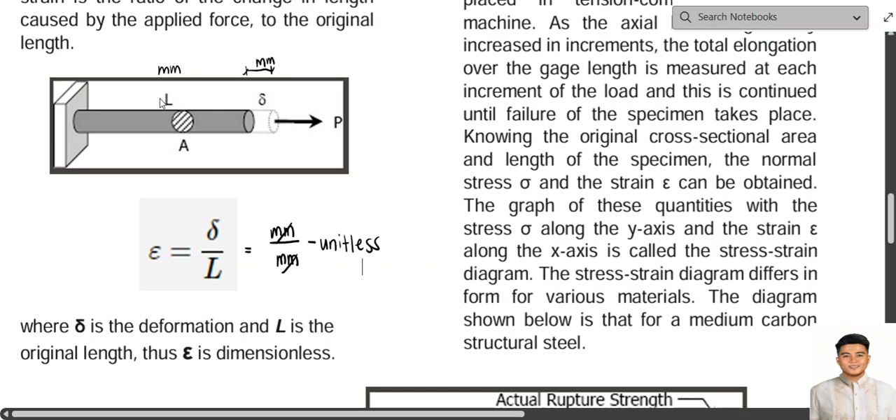And since our formula is delta over L, the unit of delta is in terms of length, or dimension, which is millimeters. And your length is also in millimeters. So what happens here is our epsilon is millimeter over millimeter, or in short, this is unitless. So our strain is unitless, it's like it's in terms of percentage.

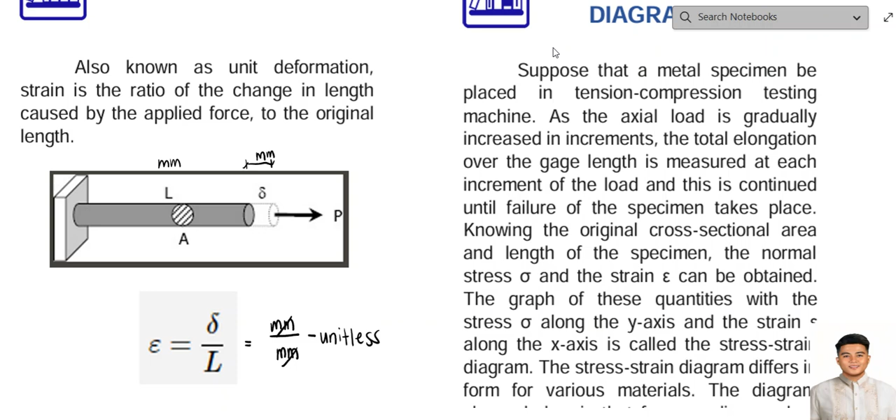Okay, so we have our Lesson 2.2, Stress-Strain Diagram. We can relate or state the relationship of stress and strain using the stress-strain diagram. So what happens here, why did they formulate this diagram? Suppose that a metal specimen is placed in a tension-compression testing machine. As the axial load is gradually increased in increments, the total elongation over the gauge length is measured at each increment of the load, and this is continued until failure of the specimen takes place.

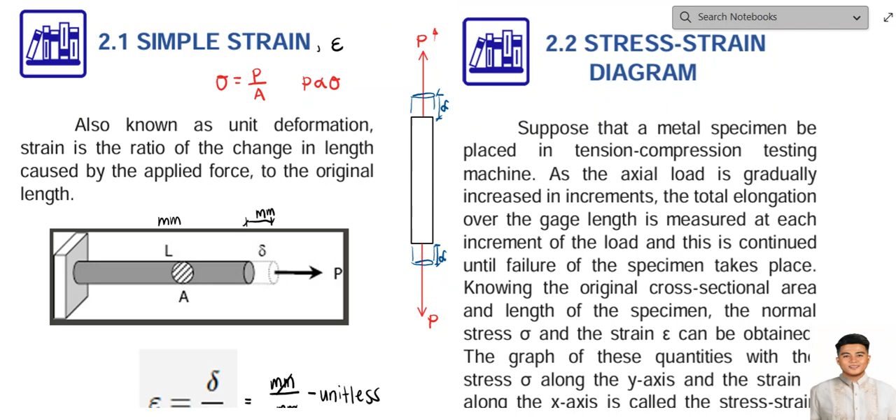So ito yung nangyayari sa ating member, itong puti. Pag nag-apply tayo ng tensile force dyan, tumataas yung stress mo, tumataas din yung kanyang strain. Nakita nyo po, itong point na to, naka-X dito, this will be the point wherein magka-crack na or mag-fail na yung ating member. Dyan na din matatapos yung ating graph kapag nag-fail na yung ating member.

Okay, i-define natin itong mga points na meron sa ating stress-strain diagram. Ito yung ating example ng stress-strain diagram with the given known points. Meron tayong tatlong points dito sa part na to, tinatawag natin siya as proportional limit, elastic limit, and the yield point. Ang tawag naman sa maximum ordinate or the maximum stress ay ultimate strength of the material.

Itong part na to, kagaya ng sinabi ko kanina, ito na yung part na kung saan magsisimula o naputol na yung ating member, so that should be your rupture strength. Meron din tayong tinatawag na actual rupture strength dito. So later on, i-explain natin kung ano ang pinagkaiba ng actual rupture at ng rupture strength natin.

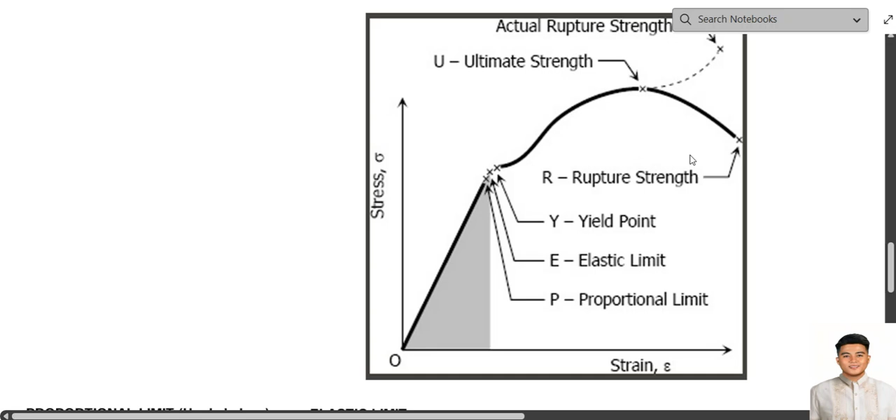Bago ko makalimutan, itong si strain natin, epsilon, pwedeng maclasify into two types. For letter A, yung unang type ng ating strain is yung normal strain.

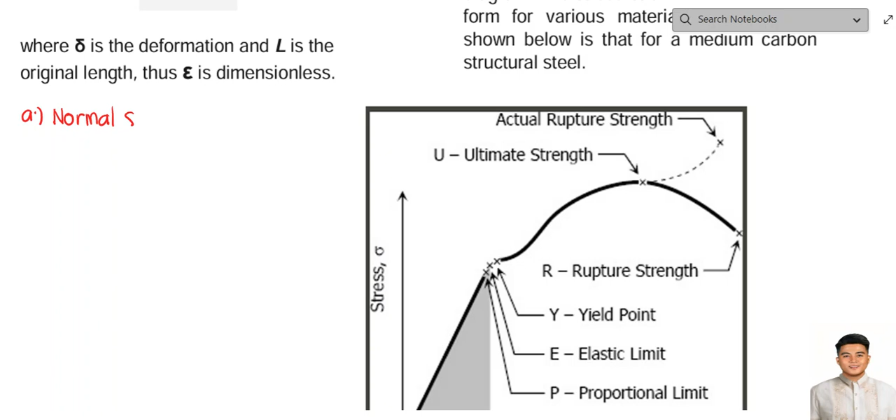Ito yung example natin na meron kang applied load dito, and then nagde-deform yan via its length. Ang nangyayari naman dito sa pangalawa, ito naman yung tinatawag nating shear strain, ang nangyayari is distortion. Ito, elongation naman to, or dimension changes.

Tandaan nyo ang pinagkaiba ni normal at ni shear strain: ang nagbabago kay normal is yung kanyang dimension o length, pwedeng mag-elongate o mag-shorten. Itong si shear strain naman, ang nagbabago dito is yung changes in angle, hindi shape, kasi hindi natin siya madidistinguish. Imagine kapag ganito yung cross section mo, square, kapag nag-apply ka ng shear strain, pwedeng mag-iba ang angle. From the original na 90-degree angle, nagbago na ngayon. Ibig sabihin, ang shear strain ay nangyayari kapag may pagbabago sa angle.

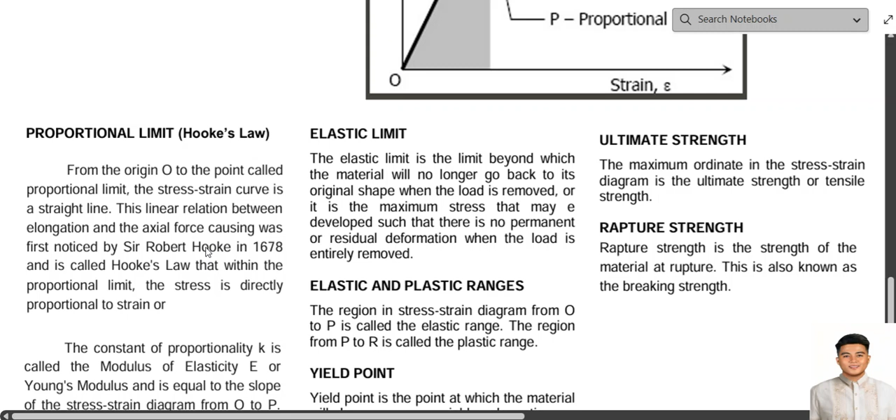Dito sa part, yung naka-gray na shade, mula sa point ng elastic limit papunta dun sa point O, ito yung tinatawag nating elastic region.

Itong block na to na makapal, papunta lang dito sa point na to, wherein si proportional ay up to the proportional limit, as we can see, nag-create yan ng straight line. Ang ibig sabihin, the relationship of stress and strain is linear dito sa part na to. Pag sinabi nating linear, as the stress increases, the strain also increases.

Ang relationship neto is linear, and we can represent this in equation. Stress is directly proportional to your strain, ito yung general equation natin dito. Pero kapag ginawa natin ito in the form of equal sign, stress is equal to, magtatabi tayo dito ng proportionality constant K multiplied by our strain.

Itong proportionality constant K, ano ba yung constant property ng ating material? So ito yung tinatawag nating modulus of elasticity, si E. Palitan natin si K ng E.

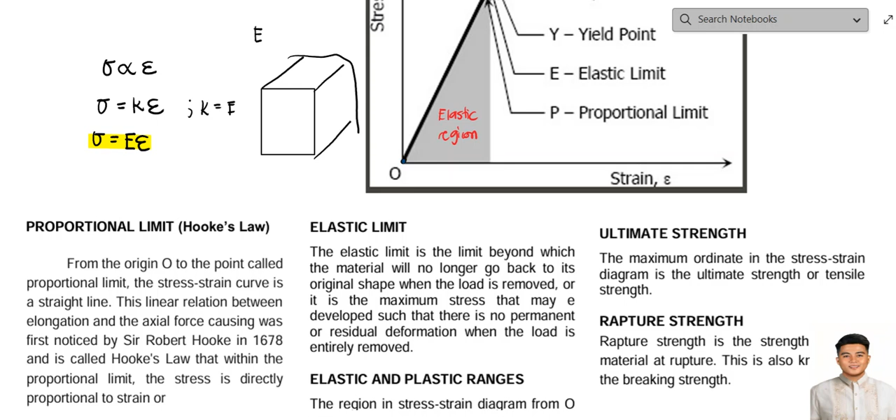Sa ating reinforced concrete design, RCD, let's say this is your cross-sectional area of your beam, and then this is the cut na part. Gumagamit tayo ng concept of Hooke's law to determine the dimension of the beam, let's say this is H or the height, and this is B or the width of the beam.

Pwede din nating masolve yung required number of longitudinal bars dito sa ating beam na ilalagay, gamit ang concept of Hooke's law. Ayun yung essence ng Hooke's law, bakit natin pinag-aaralan. First introduce dito sa ating strength of materials o mechanics of deformable bodies, at magagamit nyo ito sa inyong design subject.

Ito lang naman yung gustong sabihin ni Hooke's law. Ito yung formula. Proportional limit is also known as Hooke's law, which tells us that the stress is directly proportional to your strain. Ito yung formula na gagamitin natin dito.

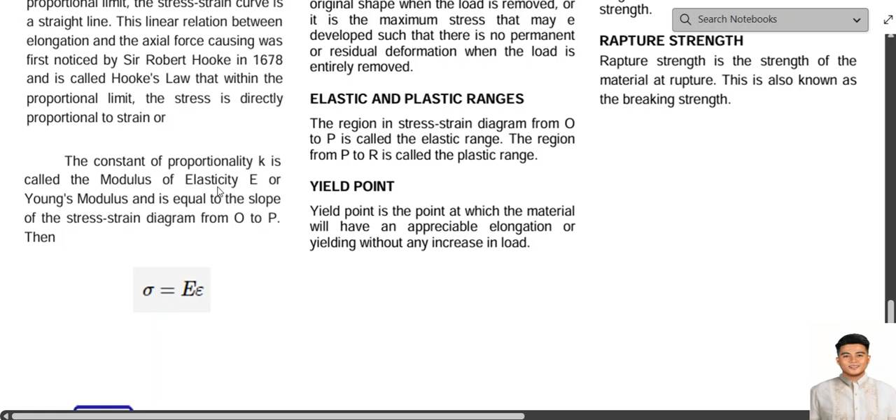Ang modulus of elasticity E ay nagvavary depende sa type of material na given. Pero ito yung gusto kong tandaan nyo: ang modulus of elasticity ng steel should be equal to 200,000 mega Pascal. At in terms of English unit, this is equal to 29,000 KSI. Yan yung dalawang values natin for the modulus of elasticity of steel, metric and English unit.

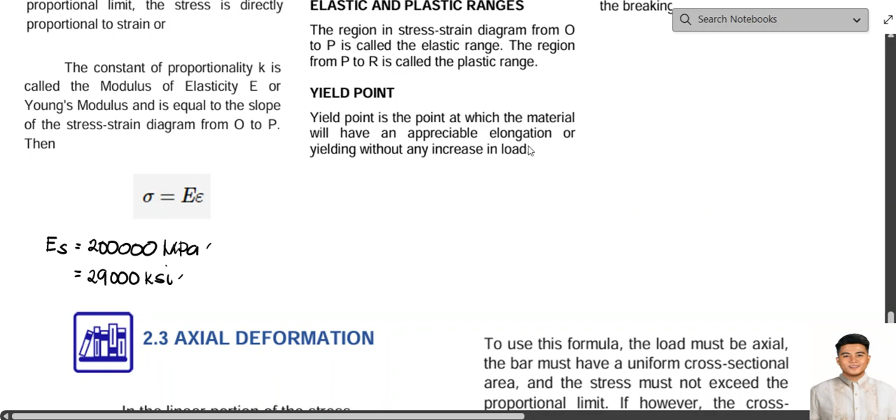Next naman natin ay yung elastic limit. Ang elastic limit ay ang limit beyond which the material will no longer go back to its original shape when the load is removed.

Ang nangyayari dito sa ating elastic limit, ito daw yung point. Mula dito sa point O, tumataas ka ng tumataas, let's say nakarating ka sa point na to. Pag inalis mo na ngayon yung load P mo dyan, ang tendency ay babalik pa rin sa dati niyang shape, dati niyang length, dati niyang itsura yung ating member na nahatak.

Pero once na ma-reach ng ating stress yung tinatawag nating elastic limit, from the word itself, hanggang dyan lang siya magiging elastic. Lower than this point, babalik pa siya sa ating original shape. Pero kapag na-reach na niya si elastic limit, magsi-start na dun, hindi na babalik yung ating member sa dati niyang itsura o shape.

Ibig sabihin, kapag inalis mo yung load P dito sa member na to, at na-reach na niya si elastic limit, hindi na siya babalik sa kanyang dating shape. Tandaan nyo, from this point pababa, itong gray na region ay ang tinatawag nating elastic region, wherein babalik pa yung sa original shape niya ang material.

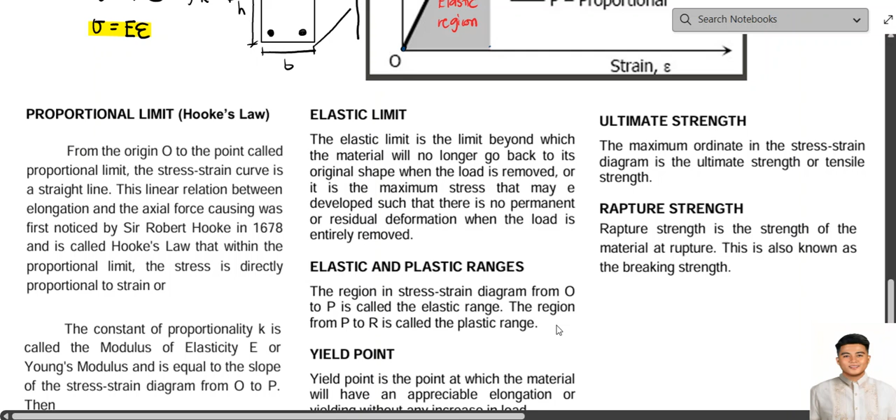Ano naman itong tinatawag nating elastic and plastic ranges? Ang region sa stress strain diagram from point O to point P ay tinatawag na elastic range, at ang region from point P to R ay tinatawag na plastic range. Itong naka-gray ay ang elastic region. Ang tawag din dito mula sa point ng elastic limit, point P, papunta dito sa ating point R, ito na ang tinatawag nating plastic region.

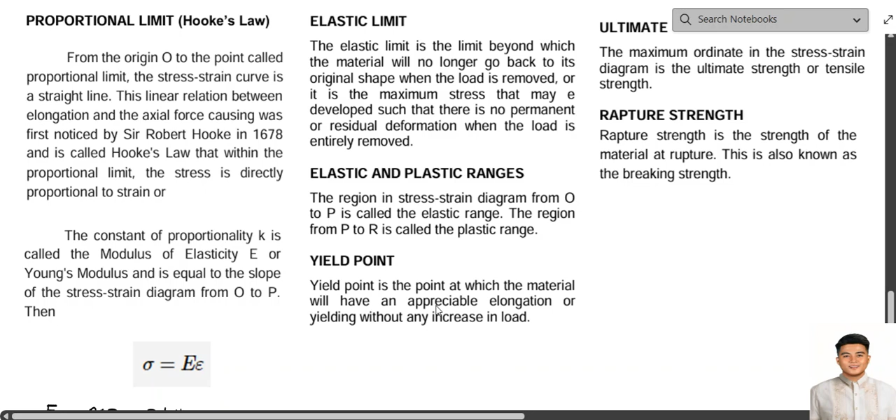So the next point is the yield point. Ang yield point ay ang point kung saan ang material ay magkakaroon ng appreciable elongation o yielding without any increase in the load. Dito sa yield point na to, magsi-start ng mag-yield yung ating member. Ano ba yung tinatawag nating yielding?

So yung yielding na tinatawag natin is that kapag yung ating load P dito, dinadagdagan natin ng dinadagdagan yung ating load P. Kaya tumataas din ng tumataas si strain. So pag na-reach niya na yung ating yield point, from that point, kahit hindi mo nadagdagan yung ating load P, patuloy pa rin nadadagdagan yung ating strain. Kaya napapansin nyo dito, kapag zoom in natin ito.

Pag zoom in natin yan, this will be your yield point. Magkakaroon pa yan ng horizontal na zero slope, parang horizontal yan. So ibig sabihin, pag nakarating ka na dito sa point na to, saka pa lang siya tataas ulit.

So, ang mangyayari dito sa ating yield point na tinatawag, nakita nyo, itong ating stress dito, iisa lang yung value. Stress, iisa lang yung value. Pero yung strain natin, nagbabago, tumataas ng tumataas. So ibig sabihin, kahit hindi mo dagdagan si force P dyan, tensile force P, patuloy pa rin na nag-elongate yung ating member. Yun yung kay yield point.

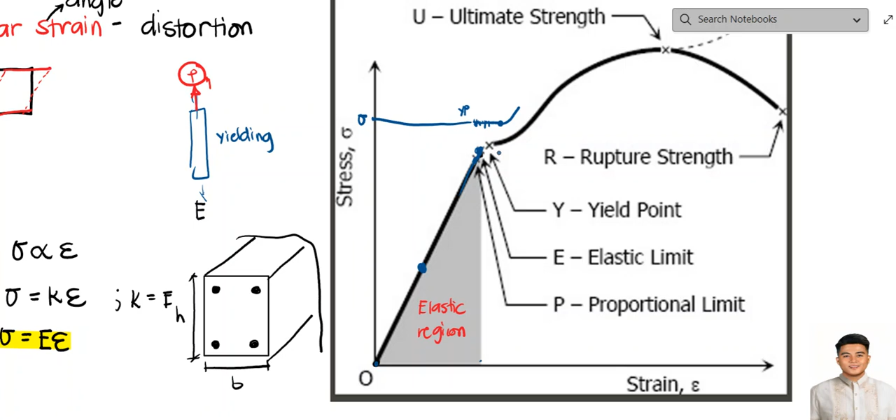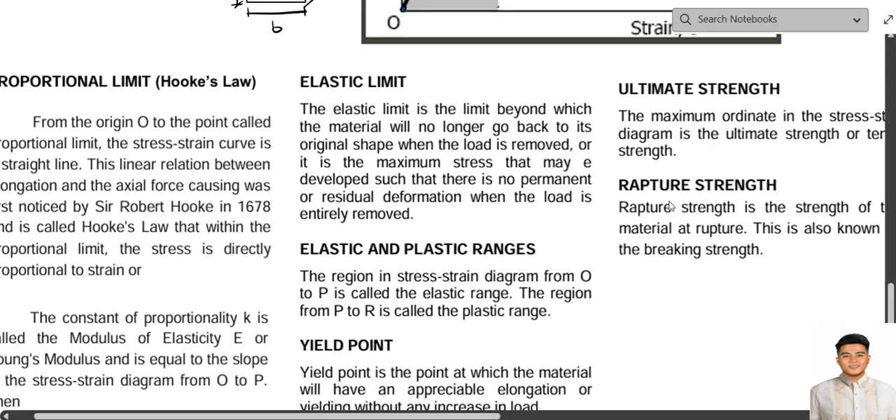So ang tawag doon is yielding. Yielding yung tawag sa nangyayari sa ating bakal na yun. So, how about the ultimate strength? Itong ultimate strength is the maximum ordinate in the stress-strain diagram. So, the maximum ordinate of the stress-strain diagram is the ultimate strength or the tensile strength.

So itong si ultimate strength natin, guys, ito na yung maximum possible stress na pwede mong i-apply doon sa ating material. And ito din na part, magsisimulang magkaroon ng necking na tinatawag.

Ano ba yung necking na tinatawag? Alam niyo yung kapag nasobrahan mo sa hatak yung isang member na bakal, pag na-reach niya na yung ultimate strength niya, that's the time na liliit yung cross-section dito sa part na yan. Tama po ba?

Tingnan nyo yung nangyari sa ating member kanina. Ulitin natin na yung nangyari sa member natin. Nag-a-apply tayo ng tensile force, until ma-reach niya yung maximum ordinate. So, nang na-reach niya na to, nagsimula na ding lumiit yung cross-section natin dito.

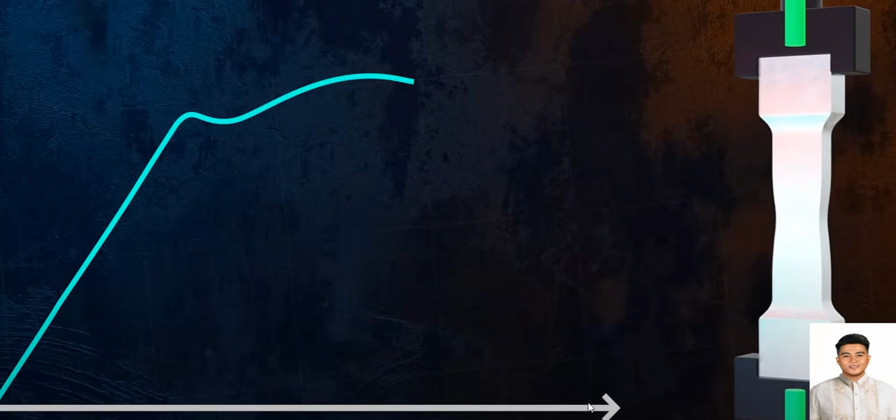Nakita nyo, lumiliit ng lumiliit hanggang mag-fail na po siya. So from this point to this point, nangyayari yung tinatawag nating necking. Yung lumiliit ng lumiliit yung cross-section natin hanggang sa mag-fail na po siya.

Kaya tignan nyo yung graph natin, bumaba siya. Nung nagsimula ng mag-necking, magkaroon ng necking, hihina si load P, kaya bumaba yung ating stress. Pero still, nag-elongate pa rin yan, kaya meron pa rin tayong pagtaas sa strain.

So sana mas maintindihan nyo yung concept ng ating stress-strain diagram kasi very crucial pagdating sa design subjects ninyo. And yung ating last point of the stress-strain diagram, ito yung tinatawag nating rupture strength or yung nominal tensile strength.

So from the word itself, nominal, ito talaga yung original tensile strength natin. So ano ang pinagkaiba naman nitong si actual rupture strength at ni rupture strength na nandito sa baba? So yun yung i-discuss ko ngayon.

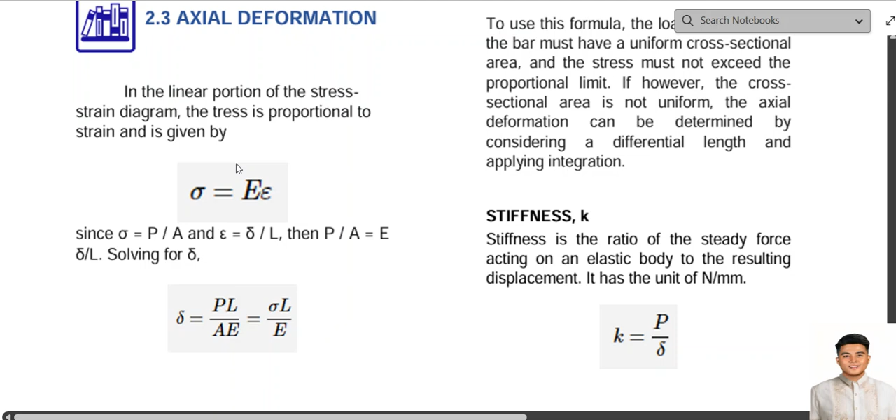So let's move on to axial deformation. In the linear portion of the stress-strain diagram, the stress is proportional to strain, as we derived earlier with Hooke's law. Using this formula, Hooke's law, stress equals the modulus of elasticity multiplied by strain.

And I mentioned earlier that your strain equals delta, or the elongation, divided by the original length, and your stress equals force over area. Substituting these two equations into Hooke's law, we get P over A equals E times the strain, which is elongation over L.

Pwede nating i-rewrite ito. Pwede nating masolve si elongation using the formula PL over EA. Ito yung formula natin for elongation, nanggaling sa concept ng strain at concept ng ating stress, at gano'n din kay Hooke's law. Ito yun, na-derive natin.

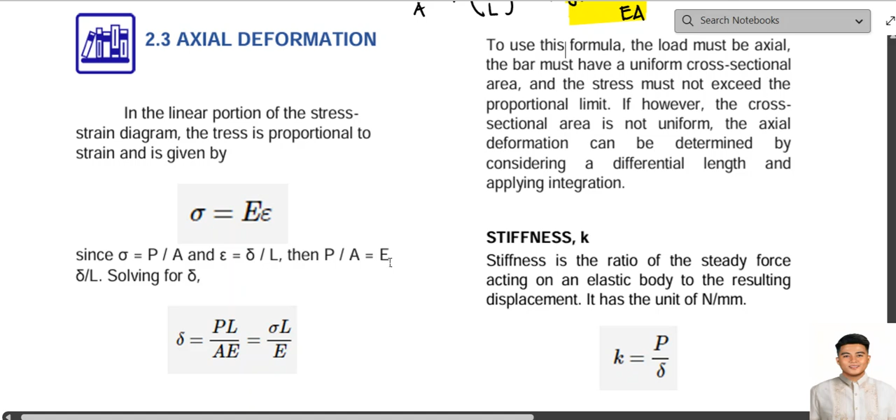So, to use this formula ng ating elongation, the load must be axial, the bar must have a uniform cross-sectional area, and the stress must not exceed the proportional limit.

If, however, the cross-sectional area is not uniform, the axial deformation can be determined by considering a differential length and applying integration. Itong PL over EA na to, ginagamit lang natin for uniform cross-section. Pero kapag hindi uniform, pwede mong gamitin itong formula ng elongation na to.

Sulat ko na lang. Elongation is equal to the integral of P, since yung cross-section is not uniform, so nagbabago yung kanyang area with a given length.

Let's say ito yung member mo, ganyan. So with respect to this axis, mag-measure ka ng length L, okay? From this point to the point kung ano yung area na yon. Tapos dito din, ganun din dun sa kabila. Ito din is L, until ma-reach mo yung kanyang maximum area.

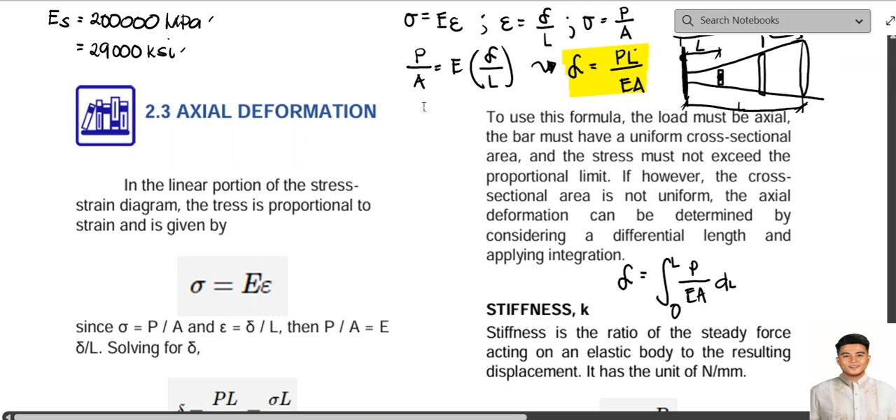At ito naman, dito naman tayo sa ating stiffness tinatawag, or stiffness K. Stiffness is the ratio of the steady force acting on an elastic body to the resulting displacement. It has the unit of Newton per millimeter. Ang mga examples ng material na may stiffness is actually yung mga bakal natin, yung spring, di ba? So, may stiffness K yun. Paki-take note na din tong formula ng ating stiffness K, which is equal to load P over the displacement or the elongation natin.

I think ready na tayo sa ating first example. Example number 1: A steel rod having a cross-sectional area of 300 mm squared and a length of 150 meters is suspended vertically from one end. It supports a tensile load of 20 kilonewtons at the lower end. If the unit mass of steel is 7,850 kilogram per cubic meter, and E is equal to 200 times 10 raised to 3 meganewton per meter squared, find the total elongation of the rod.

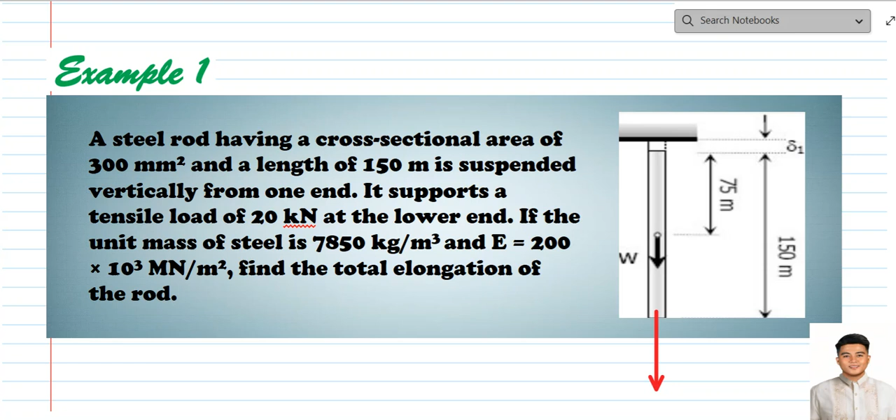Hindi lang nailagay dito sa ating figure yung given na tensile load P. Ito yung tensile load P natin at nandiyan yan sa pinakadulo. Ilagay na lang natin, this is 20 kilonewton.

Okay, sige. Solve natin to. Isulat muna natin yung mga given sa ating problem. Given natin, cross-sectional area. Area is equal to 300 millimeter squared. Length is equal to 150 meters, o i-convert natin into millimeters, that is 150,000 millimeters. Our tensile load P is equal to 20 kilonewtons, converted into Newton, we have 20,000 newtons. If the unit mass of steel is 7,850 kg per cubic meter.

Ito, tinatawag natin siya as density din, Rho yung symbol niyan. We have 7,850 kg per cubic meter. And the modulus of elasticity is 200,000, megapascal din yang meganewton per meter squared na yan. Kapag hindi man given itong E natin na to, kapag sinabi namang steel yung ating rod, automatic alam nyo na dapat na si E is equal to 200,000 megapascal. Ang hinahanap po sa atin is the elongation.

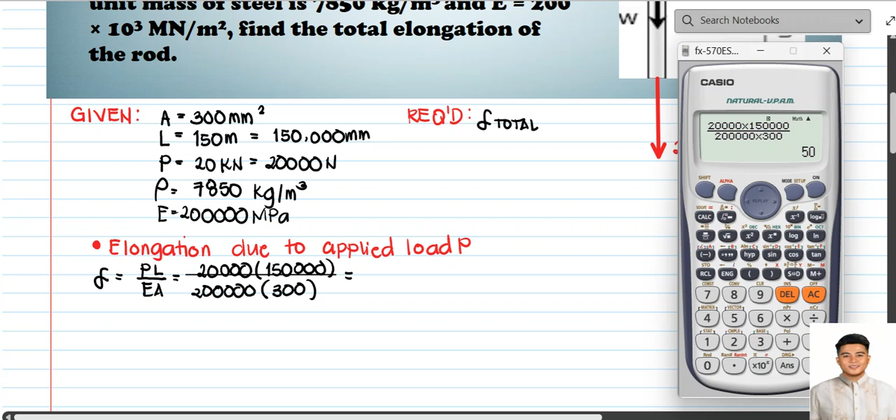Sige, tawagin ko na lang ito as our delta 1.

Saan manggagaling yung ating second elongation? Our second elongation is due to the weight. So, elongation due to its own weight.

Pero hindi natin alam kung ano yung weight natin. So masosolve natin yung weight ng ating material using this unit, density. We have density, weight is equal to density multiplied by the volume.

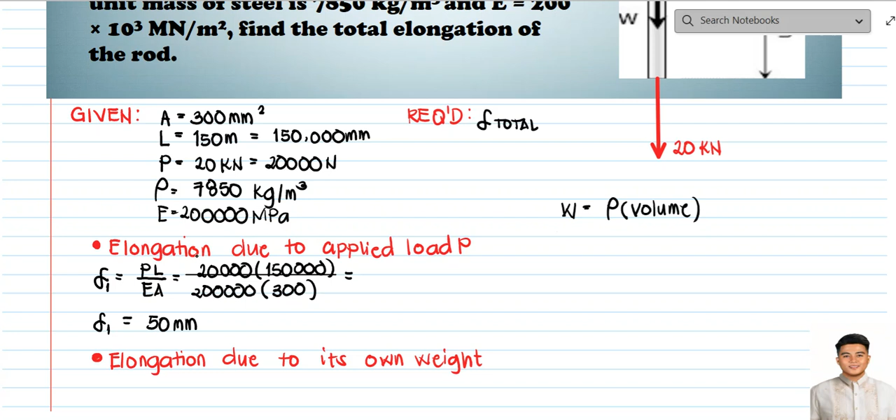Yung volume natin, ano ba yung volume na i-consider natin dito? Yung volume ng buong rod na yan. Since this is circular in cross-section, ibig sabihin para siyang cylinder. Ano yung formula ng cylinder for volume? We have area base times the height.

Dito naman, ang area base natin given na as 300 mm squared. And yung ating height is given na din as your total length. So masosolve na natin si weight.

Kailangan consistent tayo sa mga units, ha. We have our weight na, yung rho natin is 7850 kilogram per cubic meter. So dapat itong mga units natin is naka in terms of meter lahat.

So we have times 300 mm squared. Ito yung kay area base pa lang yan. And then yung length natin na 150 meters, so ito i-convert ko into meter squared. In every 1 meter, we have 1,000 millimeters. Then, quantity squared, so magka-cancel out na yun, magiging meter squared na ngayon yan.

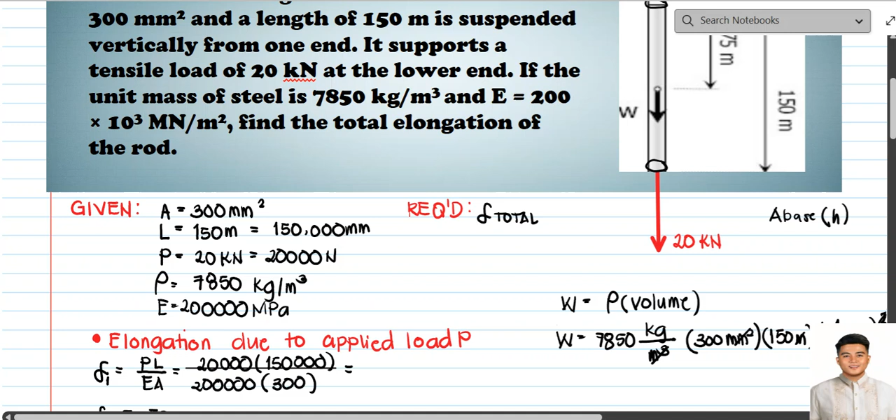Tapos, mawawala na din yan, so yung magiging unit natin dito is in terms of kilogram pa lang. Tama? In terms of kilogram pa lang yan. So magmumultiply pa ako dito ng 9.81 meter per second squared para ang unit natin is maging kilogram meter per second squared, or this is in terms of Newton. So our weight is now equal to 7850

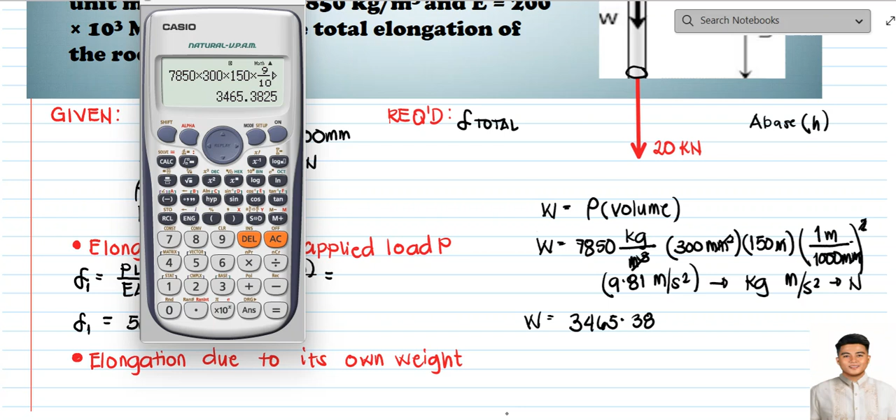times 300 times 150 times 9.81 divided by 1,000 squared. So, 3465.3825 newtons. Okay, so pwede na nating ma-solve yung ating elongation due to its own weight.

We have elongation 2 is equal to PL over EA, wherein yung ating P is your weight. So we have your weight na 3465.3825 multiplied by the length.

This time, ang length na i-consider ko is si 75 meters lang, hindi si 150. Kasi naka-apply yung ating weight sa centroid man ng ating buong rod. So, dapat nasa 75 meter yan.

So, this is 75 times 10 raised to 3 para maging millimeters divided by the modulus of elasticity na 200 times 10 raised to 3 multiplied by the cross-sectional area, that is 300.

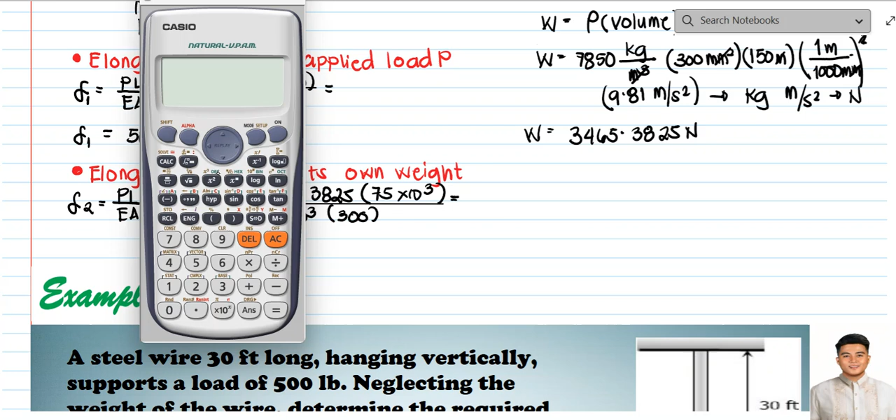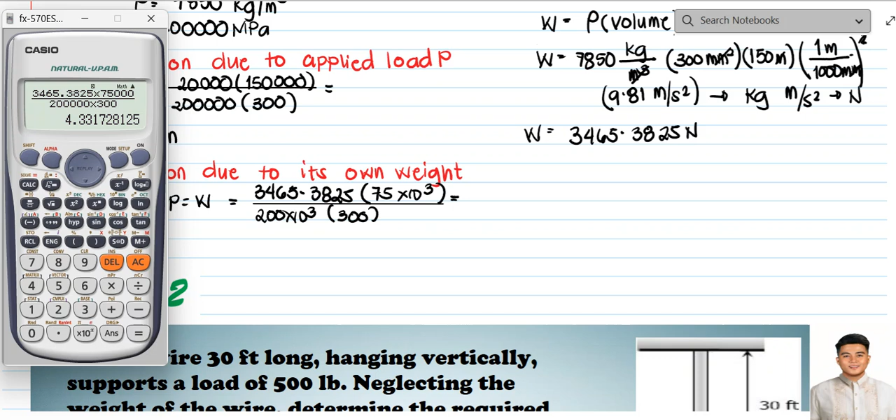Makakalahati lang ba? Ay, hindi. So 3465.3825 divided by, okay, so 75,000 divided by 200 times 300, equal. So this is equal to 4.332.

Millimeters. So our total deformation is equal to delta 1 plus delta 2. So we have 50 plus 4.332, which is equal to 54.332 millimeters. Okay, yan na yung sagot natin dito.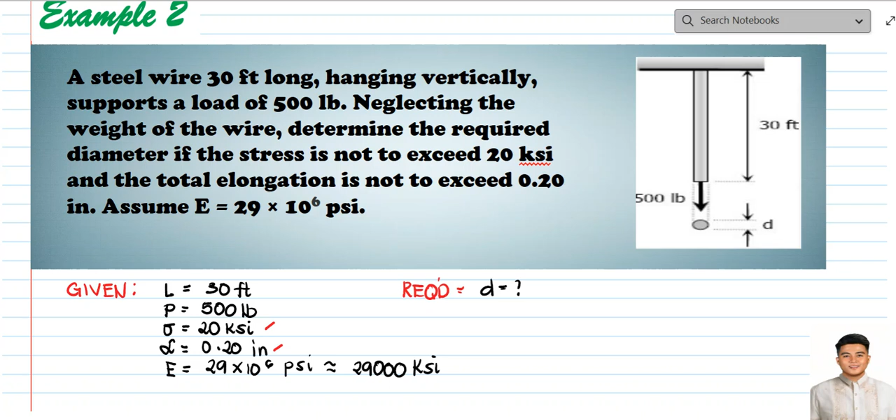Okay, so for letter A, hindi. First, unahin natin yung diameter based on the stress.

Based on the maximum allowable stress. So remember, our formula for stress is P over area.

And since our cross section is circular, solve natin si area using the formula pi over 4 multiplied by the diameter squared. So given tayo ng stress 20 ksi.

So it should be converted into psi, giving us 20,000 psi. So 20,000 din yung ilalagay ko dito. Equate natin to kay load P. Our load P is 500 pounds divided by pi over 4 times the diameter squared.

So may makuha tayong value ng diameter dito. I-rearrange ko na siya dito sa calcu, pero kayo kung gusto niyo mag-shift solve, sige, try na natin shift solve.

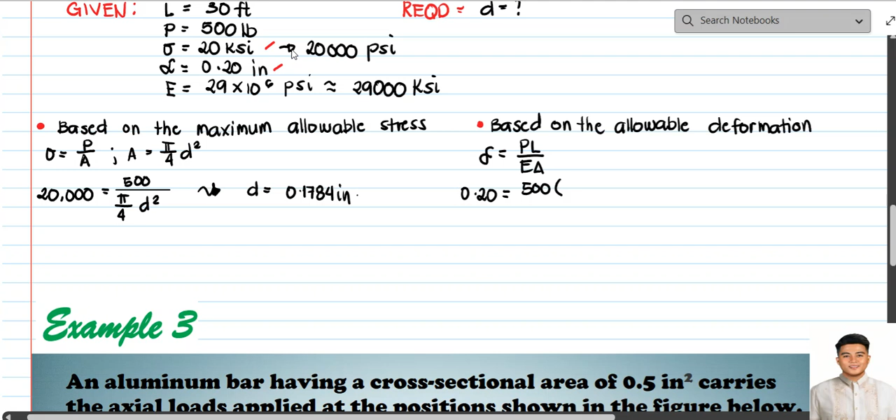Pero dito guys, since our units is in terms of PSI, in terms of inches, gawin ko na lamang itong inch. So magta-times 12 ako para maging inch yan. So this is equal to 30 times 12, 360

inches yan. So ito 360 man ito, then divided by the modulus of elasticity na 29 million. So 29 times 10 raised to 6 ang gagamitin ko, yung naka PSI, times the cross-sectional area pi over 4 diameter squared.

Ayan. So this is 0.1988. So yung D natin is 0.1988 inch.

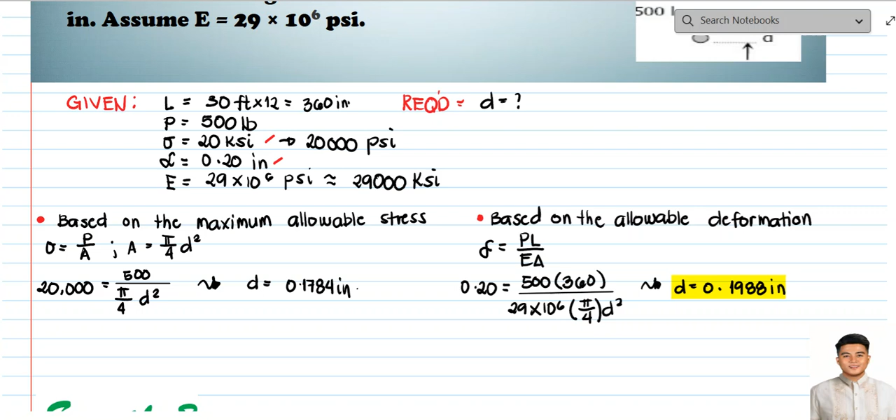So ito na po yung ating final answer dito kay example number 2. So next po tayo is kay example number 3.

An aluminum bar having a cross-sectional area of 0.5 inch squared carries the axial loads applied at the position shown in the figure below. Compute the total change in length of the bar if E is 10 times 10 raised to 6 psi. Assume that bar is suitably braced to prevent lateral buckling.

Okay, so mangyayari po dito, magka-cut-cut tayo dito mamaya, pero isulat muna natin yung given. Given.

Una na given natin is yung area natin, which is 0.5 inch squared. So yung ating modulus of elasticity is 10 times 10 raised to 6 psi.

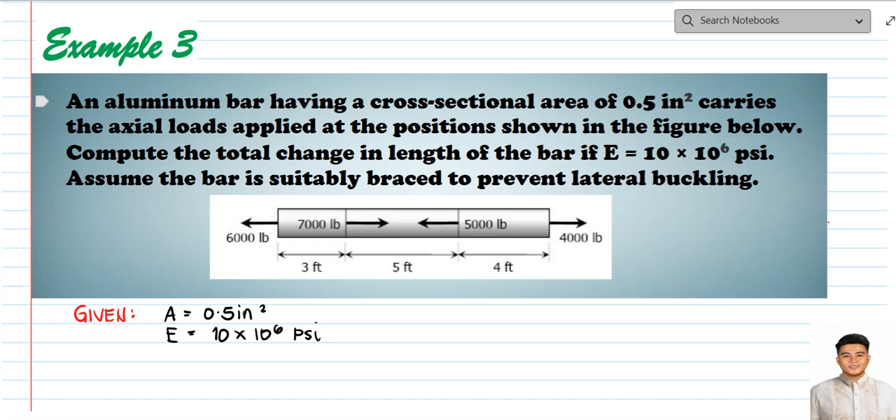So sir, bakit mali naman yung binigay nyong E? Guys, hindi porket sinabi natin na yung value ng E ng steel is 200,000 or 29,000, yun na din yung value ng ating aluminum bar. Nakita nyo, this is an aluminum. So magkaiba dapat yung ating modulus of elasticity dyan. Tama lang to na iba yung kanyang modulus of elasticity.

So i-consider natin yung mga cutting sections. I-consider natin tong cut na to. I-cut ko yung ating itong part na to, considering the left portion ng ating cut. So mangyayari dyan, sige, tawagin ko siguro tong section AA. This is your section AA.

Ito naman, section BB. Ito naman, section, pwede mo i-consider yung right, pwede mo i-consider yung left. Sige, right na lang tayo. Section CC. So kay section AA muna tayo.

At section AA, we have this cut. Ayan. So ito yung cut section natin. Masyadong mahaba. So ito yung ating applied tensile force na 6,000 pound.

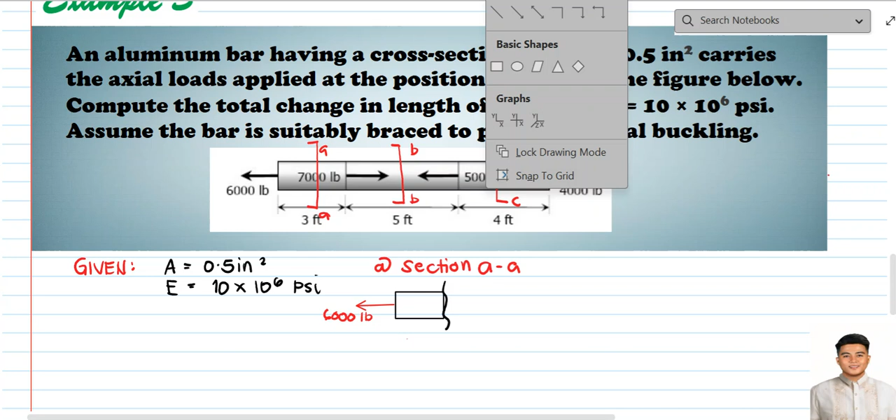So kailangan ngayon natin itong si P1 natin. So ito yung tawagin natin as P1. Okay, so P1. So by using summation forces horizontal is equal to 0, we all know that P1 is also equal to 6,000 pounds. So summation forces X equals 0, to the right is positive. So we have P1 is equal to 6,000 pound.

Next, section BB. At section... okay, so ito yung part na may ano, ate, 6,000.

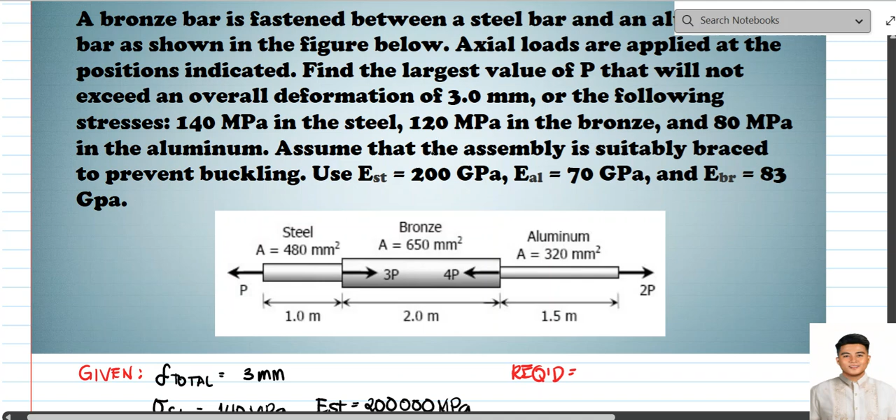At pipiliin natin yung pinakamababa sa kanila. Yun na din yung magiging allowable load P natin na hinahanap. So yung require natin dito is load P, ang largest value sa load P.

Okay, so our first step is magka-cut na naman tayo, no? So this is your cut section AA, cut section BB, and your cut section CC.

Pero pwede din naman nating i-consider yung ating portion na right, no? So this is CC. Okay, siguro kopyahin ko na lang yung mga ano kanina. So this is for section AA, yan, ito yung section AA natin.

So this is your load P, di ba? Isang P lang yan, isang P. So by summation of forces horizontal or X is equal to 0, to the right are positive. So we have your P1, or mas okay siguro tawagin natin to as P steel. So P steel, PST. So our PST, we have PST na pakanan minus P is equal to 0. So your PST is equal to P. This is your equation number 1.

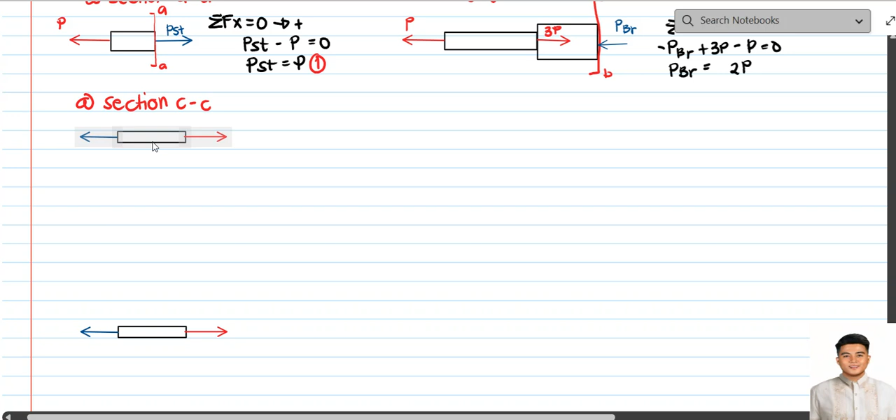So next, at section CC, okay, section CC tayo. Kunin natin yung figure natin, so ito yun. Ayan, so ito yung ating cut section, right? Itong part na to. Ito yung cut section natin, section CC.

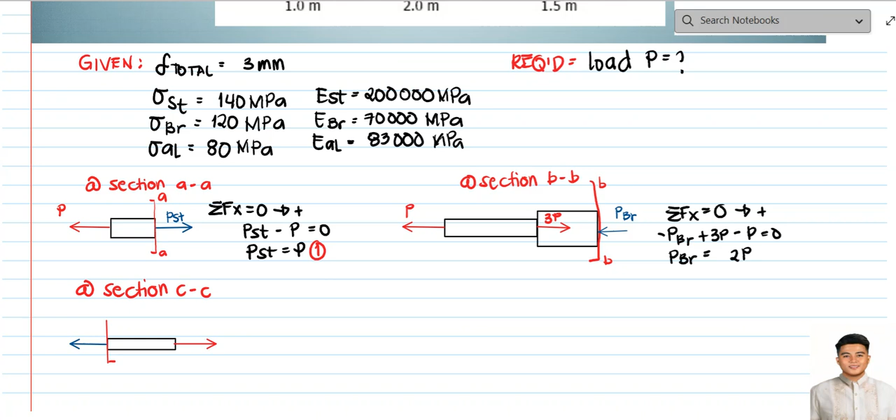So if this is load 2P, ito naman yung ating load na P of the aluminum. Okay, so by summation of forces X is equal to 0, to the right are positive. So at ang ating P aluminum is negative yan, plus 2P is equal to 0. So our P aluminum is equal to 2P. And this is tension, this is compression, this is tension. Again, this is your equation 1, this is your equation 2, and this is our equation 3.

So punta na po tayo doon sa mga given stresses natin. Unahin na po natin yung stress kay steel, no? Based on the allowable stresses, okay, unahin natin si steel.

So, ang ating formula for stress is stress is equal to P over the area. So parang ito magiging stress ng ating steel is equal to P steel divided by area ng ating steel. Ang hinahanap natin dito is yung ating load P. Substituting all the values, stress of your steel na 140 megapascal equated to PST, single P lang yan, divided by the cross-sectional area of your steel. Ano yung cross-sectional area ng steel? 480 millimeters squared.

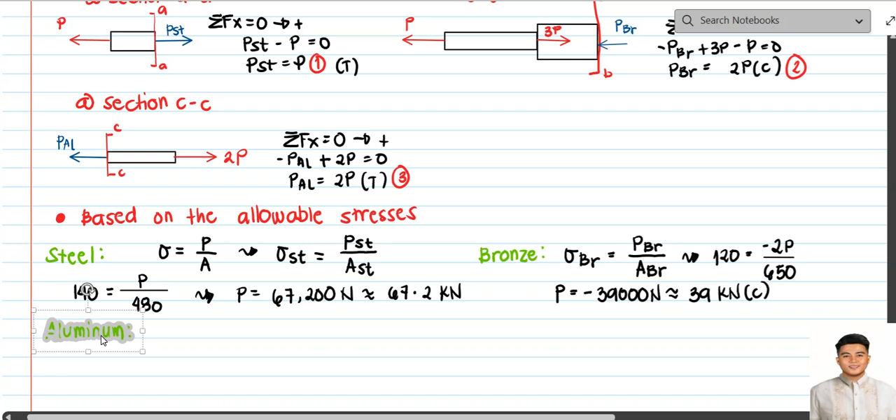Okay so next, another load is from the aluminum. So ang ating formula for stress is P all over A ulit. Medyo ibaba ko na lang siya siguro. Our stress from the aluminum is equal to P aluminum divided by the area of your aluminum. Stress of aluminum is 80 megapascal. Equate natin to kay 2P all over area of your aluminum, 320 millimeters squared. So meron tayong value ni force P dito. We have 80 times 320 divided by 2. 12,800 newtons, or this is 12.8 kilonewtons.

So meron na tayong 3 values of P. Siguro ang gawin ko na lang dito, medyo i-highlight na lang muna natin siya, no? Para masyadong malaki. Lagyan lang natin siya ng palatandaan na lang. Para hindi na tayo malito mamaya maghanap. Okay, so we have 3 values. Kita nyo ba?

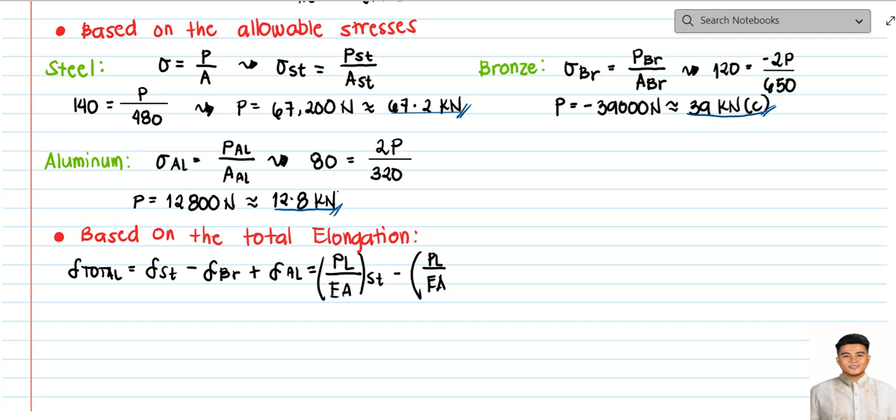Okay, then substituting the value, we have P steel, L all over, L steel din to ha. Hindi, lang, para mas minsanan na lang. PL over EA, ito ay para kay steel. And then minus PL over EA, ito ay para kay bronze, plus PL over EA, ito ay para kay aluminum natin. So isubstitute natin yung mga given values po natin dito.

We have total elongation na 3 millimeters. Then equate natin to kay PL over EA. P ng ating steel, P steel natin is single P lang yun, no? P times yung length ng ating steel is 1 meter, so dapat ito naka-millimeters siya, 1,000 yan. So 1,000 na length divided by modulus of elasticity of your steel is 200,000, times the cross-sectional area. So your cross-sectional area is 480 millimeter squared.

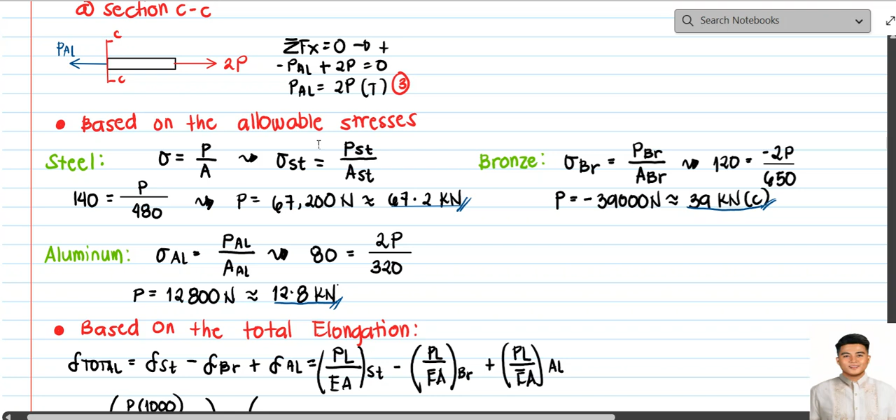Okay, next minus. So minus natin si load P, P ng ating bronze. So yung P ng ating bronze is asan na yan? P bronze. Eto. Nandiyan ba yan? Eto, dito. Yung P bronze natin is 2P din lang. So ilagay natin 2P multiplied by the length of the bronze. Length ng bronze is 2 meters converted into millimeters, so 2,000 yan. 2,000 divided by the modulus of elasticity na 83.

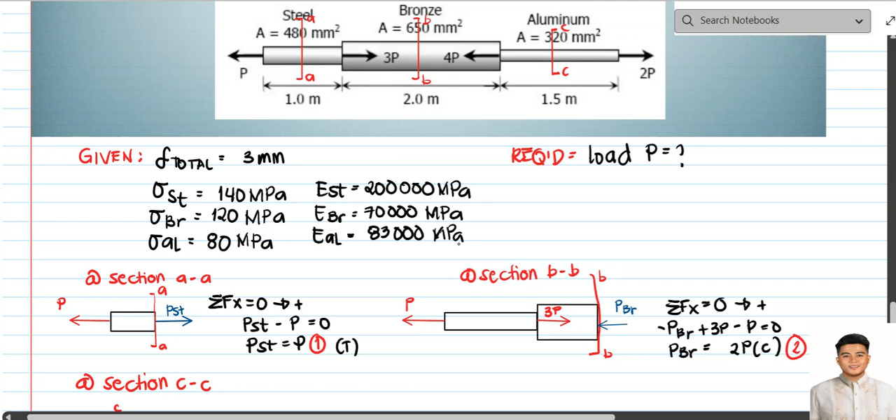Tama ba? 83,000. Ay, 70. Okay, so napagbaliktad ko lang pala to. So this is for E aluminum and this is for E bronze. E bronze 83,000, E aluminum is 70,000 megapascal. Okay, so 83,000 yung ating E bronze dito, times the cross-sectional area ng bronze natin, 650.

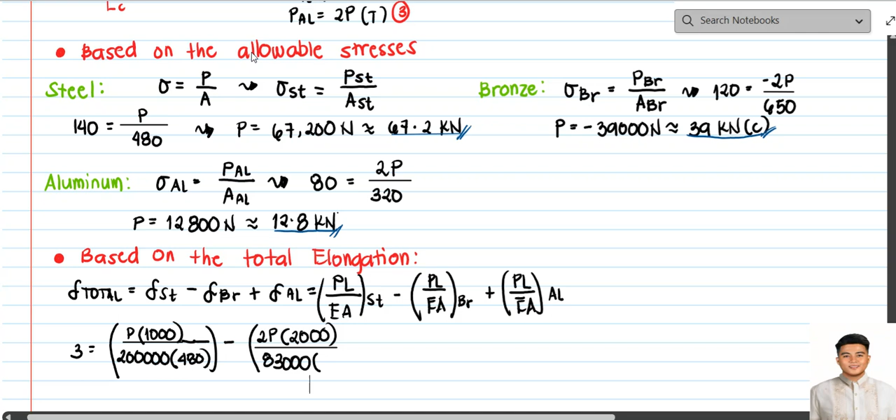Ayan, so plus P aluminum, our P aluminum is 2P. So 2P times the length of your aluminum is 1.5 meters. So magiging 1,500 millimeters, divided by the modulus of elasticity, 70,000, multiplied to the cross-sectional area, 320.

Okay, so shift solve, makukuha na natin yung load P natin dito. So 3 alpha solve, we have 1,000 P divided by 200,000 times 480 minus 2P times 2,000 divided by 83,000 times 650 plus 2P times 1,500 divided by 70,000 times 320. Shift solve.

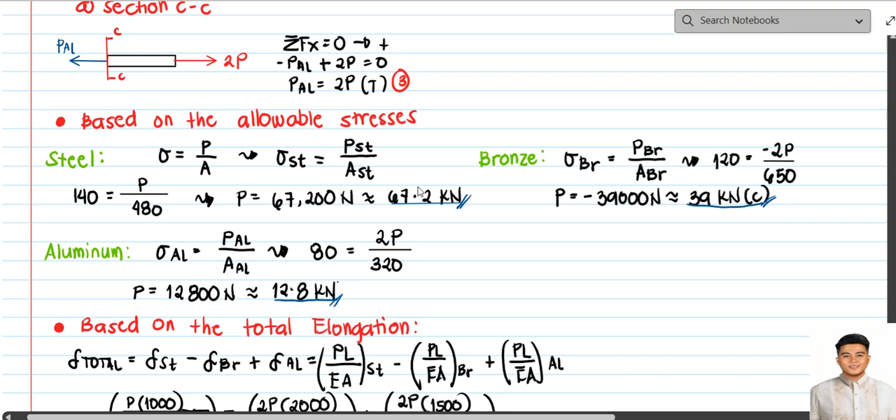Itong apat na to, as you can see, we have four values of P. We are looking for the maximum allowable load P that can be applied to this connection, para hindi mag-fail si aluminum, si steel, si bronze. So piliin natin dito yung pinakamababang load P para kayang-kayang ibuhat ng lahat. So our answer is 12.8.

Safe load, P is equal to 12.8 kilonewtons. So dapat ganito yung makita ko sa solution nyo. Kapag kulang yan, mali din lang.

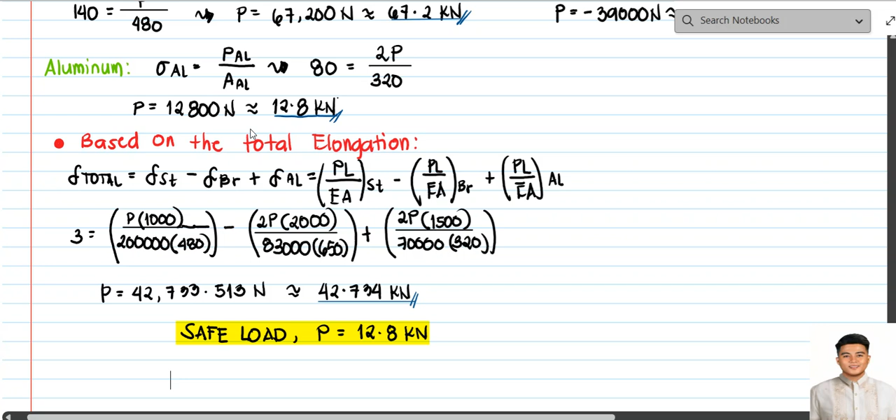So proceed na po tayo dito sa ating example number 5. A rigid bar ABC shown in the figure is hinged at A and supported by a steel rod at B. Determine the largest load P that can be applied at C if the stress in the steel rod is limited to 30 kSI and the vertical movement of end C must not exceed 0.1 inch.

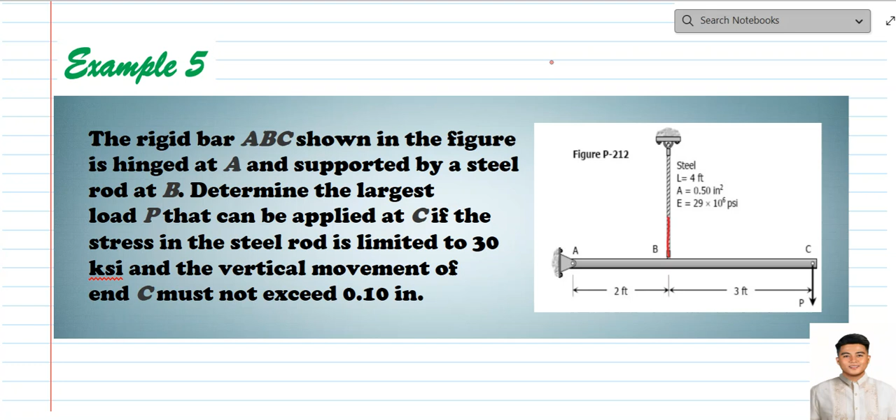So ang gawin natin dito, i-drawing natin yung kanyang free body diagram. Itong ating rod dito is merong tensile force. May tensile force tayo dito, and meron din naman tayo ditong reaction since this is hinge, so meron tayong Y and meron tayong X. Ito yung ating AY, ito yung ating AX, and tawagin natin to as your P steel, PST. So pwede nating masolve yung ating PST using this given stress na nandito.

Tama? Kunin muna natin yung ating PST. So we have the formula, stress is equal to, stress in steel is equal to PST all over the area of steel. So our stress sa steel is 30 KSI.

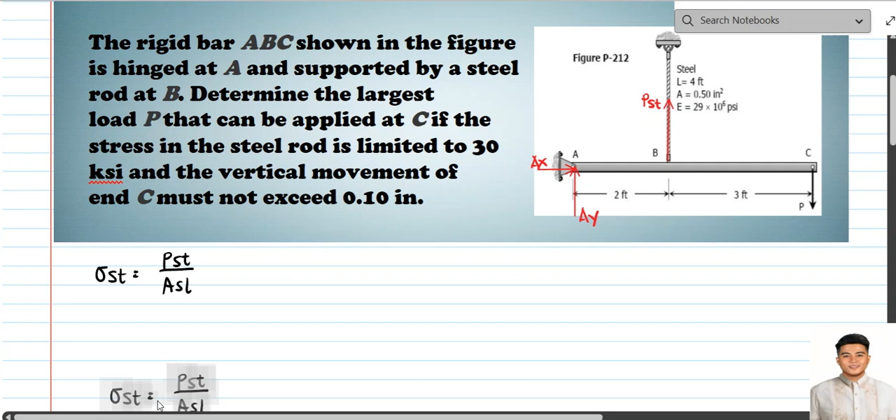Anyway, isulat siguro muna natin yung given para mas madali tayong maghanap. So our given values, we have yung ating stress sa ating steel is equal to 30 KSI. Then yung ating vertical movement at C, tawagin ko siya as YC, is equal to 0.10 inch. Isolve na natin siya.

Solution natin. So this is our solution. Okay, so our PST is yun yung hinahanap natin, tama ba?

Substituting the value of our stress kay steel is 30 KSI, and that should be in PSI dapat, so magta-times 10 raised to 3 ako para maging PSI na siya. Then equate natin to kay PST, yung hinahanap muna, then divided by the value of your AST. Yung AST natin is 0.50 inch squared. So our answer here is in terms of pounds. PST is equal to 30,000 times 0.5, so 15,000 pound. Kailangan natin ito mamaya.

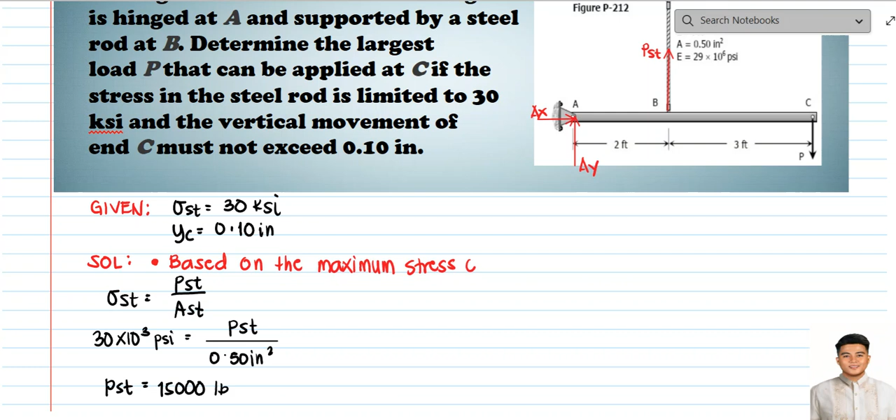Ngayon, kunin na po natin yung ating load P. So this is based on the given allowable stress, or based on the maximum stress of the steel rod. Kunin na po natin yung ating force P.

So by summation moment at A, equate natin to sa 0. Summation moment A is equal to 0, clockwise is positive. So our force P, yung rotation niyan is clockwise, multiplied by its moment arm na 5, then minus yung PST natin, rotation niya is counterclockwise, so that is minus. Your PST is 15,000 pounds times the moment arm na 2 feet. Yung iikot, wala na. So this is equal to 0. So your force P is now equal to 30,000 divided by 5. Press equal, so 6,000 pounds, or this is equal to 6 kilopounds.

Yan, so ito yung P galing kay maximum stress ng steel rod natin. How about the given vertical movement of the end C? Ang ibig sabihin ng vertical movement, guys, is itong ating rod na to mag-move siya vertically downward since due to the load P, syempre mag-change yan ng kanyang position. So pwede siyang mag-move pababa itong si point C natin. Kapag nag-move po yan pababa, ang magiging itsura ng ating motion is ganito.

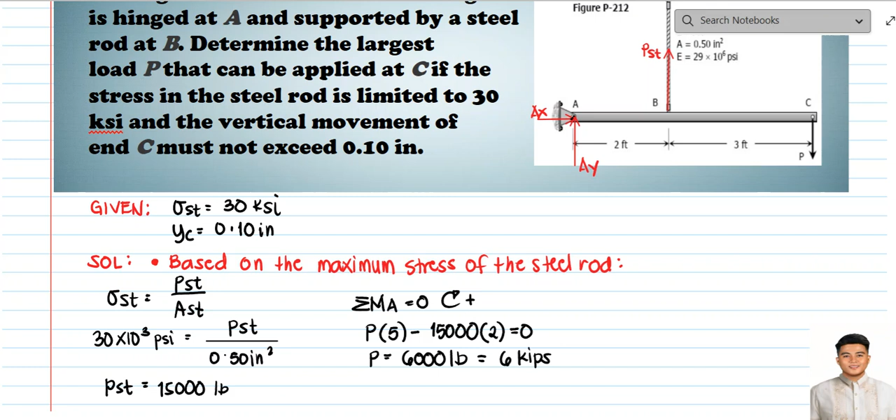Okay, ganito yan. So ito na ngayon yung ating originally, andito yung ating bar, okay? Ngayon, mag-change location yan, magiging ganyan due to the load P dito. Kapag magiging ganito yung positioning niya, masosolve po natin yung hinahanap.

Masosolve natin yung hinahanap nating load P, based on the given na elongation kay steel. So solve natin yan, erase ko muna to. Ang gagawin ko, by ratio and proportion, pwede nating masolve yung ating elongation ng ating steel.

Elongation ng ating steel, using this triangle na malaki, we have 0.1 inch, based on the movement at C. So 0.1 inch is to kung ilan yung length nito, papunta doon. Baka hindi nyo ma-gets to, sige i-drawing ko na lang yung big triangle, by ratio and proportion, by similar triangle.

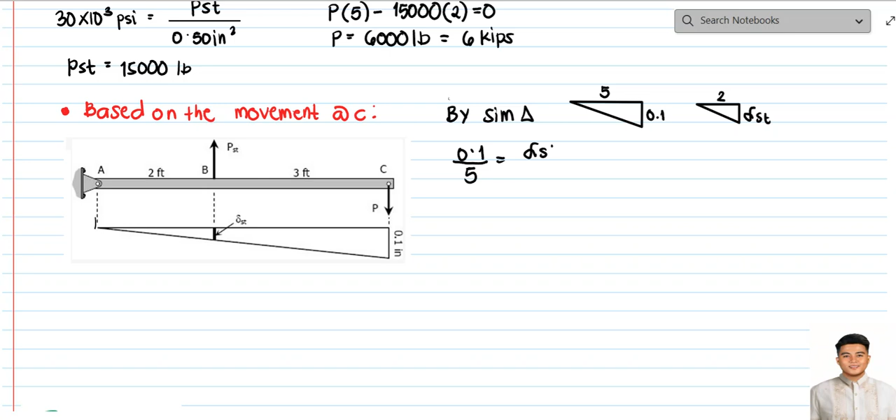May makukuha tayong value ng ating elongation ng ating steel dito. Our elongation of steel is 2 times 0.1 divided by 5, so 0.04 inch - inch yung unit natin dito. So 0.04 yung ating elongation.

Using this elongation, makukuha po natin yung ating PST. Elongation of steel is equal to PST times L over EA. So elongation ng steel is 0.04 is equal to PST multiplied by the length of that steel rod, which is 4 feet. Dapat ang ating unit dito is in terms of inches, so magta-times 12 ako para maging inch yan, divided by the modulus of our elasticity.

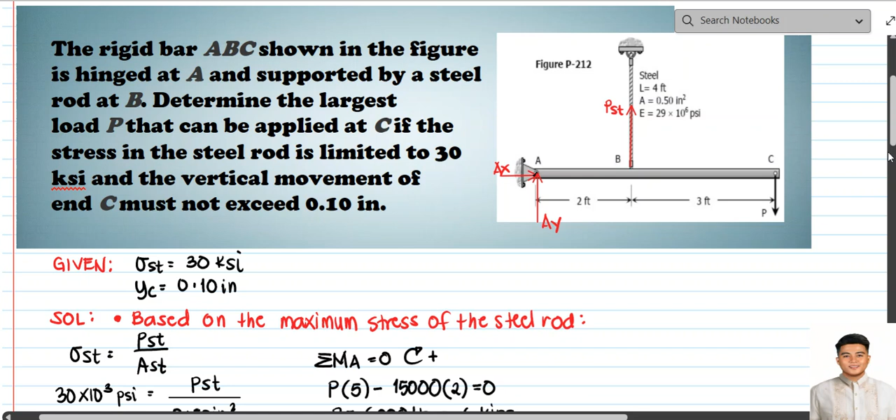The modulus of elasticity of steel is 29 times 10 raised to 6 psi, multiplied by the cross-sectional area, 0.5. So ibibigyan tayo ng value na 0.04 times 29 times 10 raised to 6 times 0.5, equal divided by 4 times 12. So our PST is 12,083.333.

12,083.333 pounds. So after that, saka tayo magmo-moment kay A ulit. Parang ganito din lang, copy natin to, magbabago lang yung PST natin. So summation moment A is equal to 0, clockwise is positive. So your value of P, clockwise yung rotation niya, multiplied by its moment arm na 5.

Minus yung ating PST, hindi na siya 15,000, based sa elongation na ng ating steel, equal to 12,083.333 multiplied by the moment arm na 2. Equate natin do kay 0. So our P is equal to 12,083.333 times 2 divided by 5.

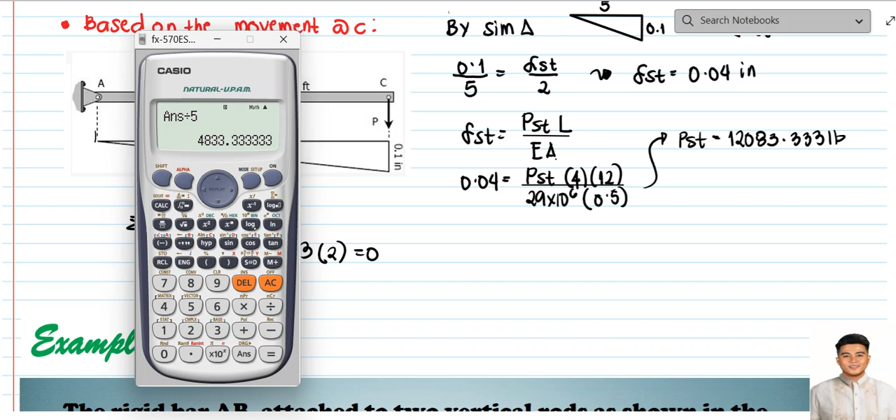4,833.333, or this is equal to 4.83 kips, kilopounds. So based on the given values of P, piliin natin yung mas maliit na value. So our sagot is safe load P is equal to 4.833 kips.

Ito na yung ating final answer, guys, kay example number 5. So again kinumpare ko to kay 6 kips, kaya mas maliit si 4.833, so pipiliin natin yung mas maliit na value.

Okay, we have our next example, example number 6. The rigid bar AB attached to two vertical rods as shown in the figure. So is horizontal before the load P is applied. Determine the vertical movement of P if its magnitude is 50 kilonewtons.

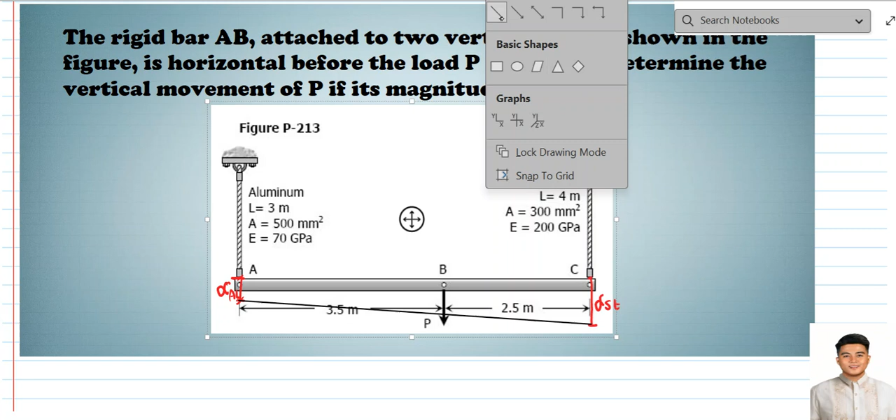Ang gagawin ko po dito is isosolve natin yung elongation ng ating aluminum. So let's say mag-elongate yan at certain elongation, tapos mag-elongate din itong si ating steel. Elongation ng aluminum, at syempre, yung nasa gitna niya, ito yung elongation ng ating load P. I-connect lang natin ito, itong dito papunta dyan. So this should be the elongation or the vertical movement na hinahanap sa atin, ito yung vertical movement na hinahanap.

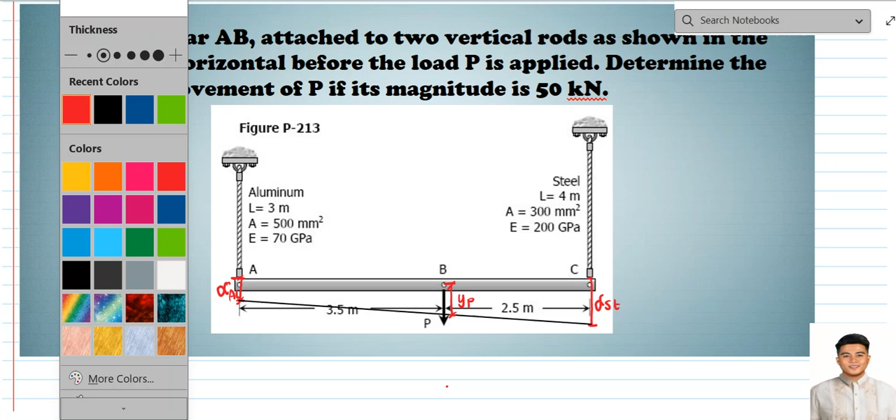Vertical movement of P, YP na lang. Paano natin yan masosolve? Gumamit tayo ng kagaya kanina, ganito din lang, pero masosolve kasi natin dito yung ating reactions. Kunin muna natin yung mga reactions na nandito - ito yung ating reaction kay A, and this is your reaction kay C. Tama? So ito yung ating PST.

Ito naman yung P aluminum. So, P steel, P aluminum. So, by using summation moment, kahit saan muna para makuha natin yung isa sa kanila, given that your load P is equal to 50 kilonewtons.

Siguro magmo-moment muna ako dito sa C. Summation moment at C is equal to 0, clockwise rotation is positive. So, we have P aluminum times the moment arm na 6 meters, minus P, 50 kilonewton multiplied by its moment arm na 2.5, equated to 0, then masosolve na natin si P aluminum.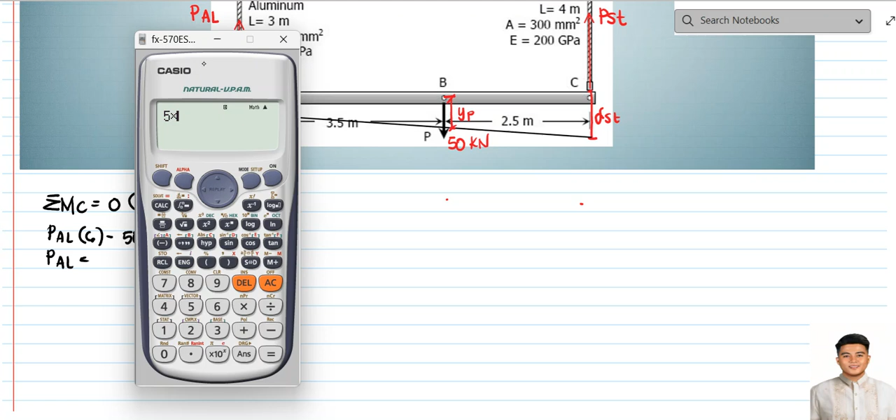So our P aluminum is equal to 50 times 2.5 divided by 6. So this is equal to 20.833 kilonewtons.

20.833 kilonewtons. So by summation forces Y, is equal to 0, all upward forces are positive, makukuha na natin si P steel. Summation forces Y is equal to 0, upward is positive, so we have P aluminum plus P steel minus 50 kilonewtons equals 0.

So given tayo ng P aluminum na 20.833, plus PST minus 50 is equal to 0. So your PST, mag-minus lang tayo ng 50 dyan. So, 29.167 kilonewtons. Yan na yung ating mga values na gagamitin natin to solve for the elongations of your aluminum and elongation of your steel.

Sige, kunin na po natin yung elongation ng ating aluminum. So, elongation of your aluminum is equal to P aluminum L over EA. So, P aluminum na 20.833 times 10 raised to 3 para maging newtons yan, multiplied by the length of the aluminum, that is 3 meters, so 3,000 po dapat ito.

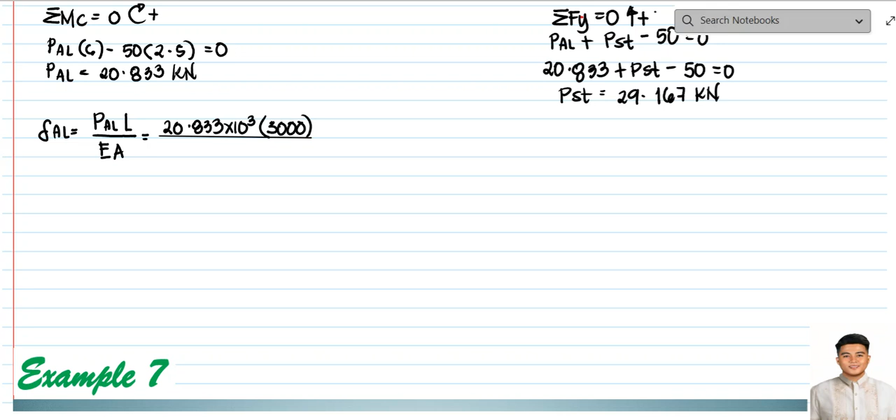Okay, so ilipat ko muna ito dito na lang. Divided by the modulus of elasticity of your aluminum, 70 GPa, which is 70,000 MPa din lang yon. Then, multiplied by the cross-sectional area na 500 mm squared. So, given tayo ng elongation of aluminum.

So, 20.833 times 3,000 divided by 70,000 times 500. So, 1.786 millimeters. So, how about the elongation of your steel?

So, elongation of steel is equal to PST times the length of the steel divided by EA. Plug in the values. We have 29.167 times 10 raised to 3 para maging newtons, times L na naka-millimeters dapat, so 4,000 yan, divided by the value of your modulus of elasticity, 200 GPa or 200,000 MPa din lang yon, times the cross-sectional area na 300 mm squared.

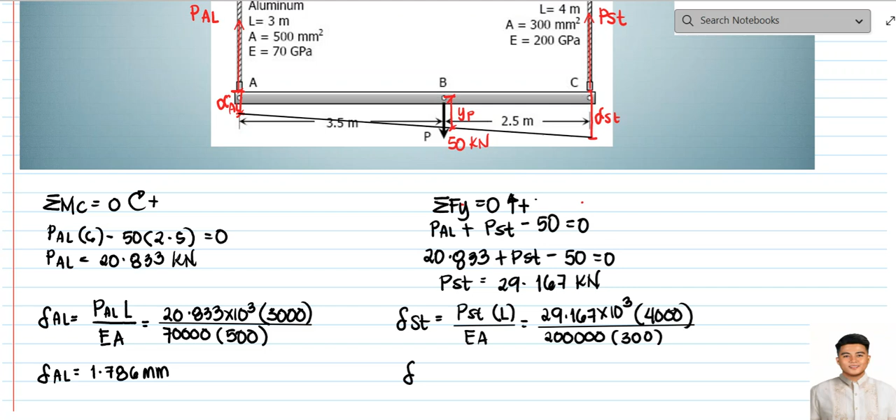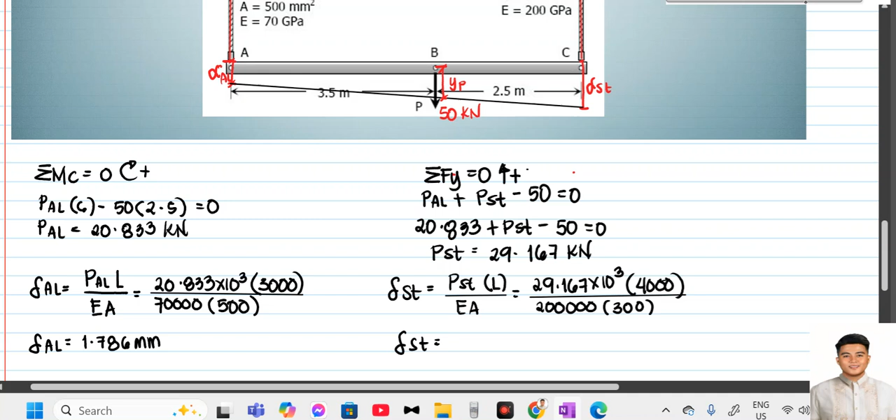So, our elongation kay steel is equal to... calculate natin ito guys. We have 29,167 times 4,000 divided by 200,000 times 300. So, elongation is 1.944 millimeters.

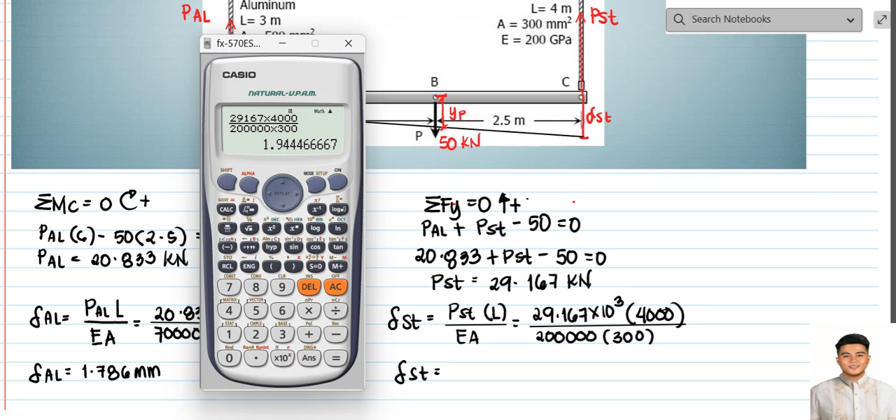So, paano natin makukuha yung ating buong distance na to? Ito yung hinahanap, ito. Tawagin natin to as your distance y prime. So, kunin muna natin si y. Yung y muna yung kukunin natin. By ratio and proportion using this triangle na ito.

Ayan, kunin natin yung triangle na yan tapos yung triangle na malaki. Kunin ko itong side na to ng ating triangle. So, this side is 1.944 minus 1.786.

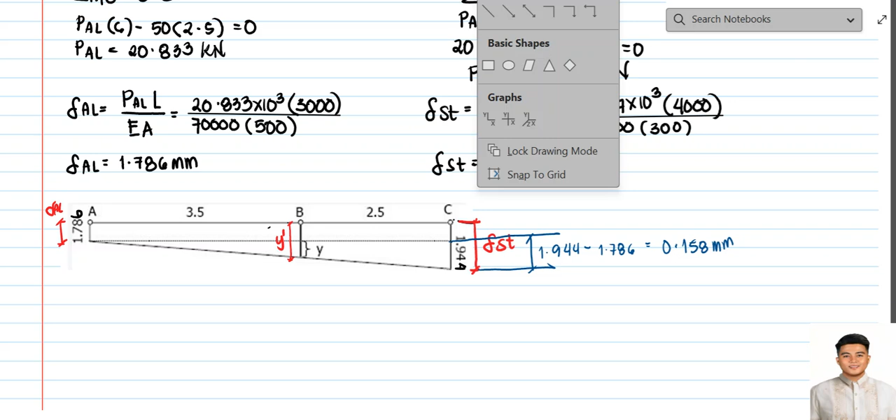So this is equal to 0.158 millimeters. So by using ratio and proportion or by similar triangle, ito yung maliit na triangle natin, tapos ito yung malaking triangle. Sige, tuloy natin. So, this is 0.158 and this is 6. Tapos ito yung y mo, and then this is 3.5.

So, by similar triangle, y is to 3.5 equals 0.158 is to 6. So, bibigyan niya tayo ng value ng y. So, yung y natin, we have 0.092 millimeters.

Okay, so pwede na natin kunin yung ating y prime, or tawagin na lang din natin siyang in terms of elongation. So, elongation at b is equal to this distance plus this distance na y. So, this distance na ito is 1.78 or elongation at your aluminum plus your y.